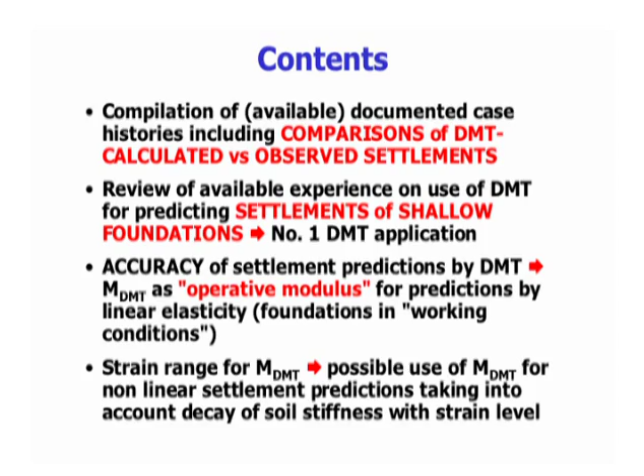Some of these aspects have been already illustrated so far, so I won't give many details. Just to recall that the constrained modulus MDMT is the basic deformation stiffness parameter obtained from DMT.

The important fact is that this modulus is obtained from DMT measurements by using a correction factor depending on KD, the horizontal stress index, that incorporates information on stress history and horizontal stresses. And the necessity of stress history for a realistic assessment of settlements has been emphasized by many researchers.

Many comparisons available, both in terms of comparisons of moduli from DMT and obtained by other methods, say high-quality oedometers, and also in terms of predictive and observed settlements, have shown that this modulus is reasonably accurate and dependable for everyday design practice.

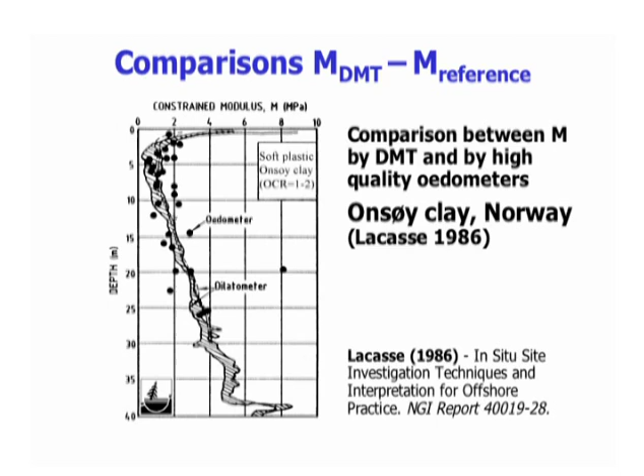These figures have already been shown. This is a comparison between moduli from DMT and from high-quality oedometers obtained by Lacasse at NGI in Onsoy Clay in Norway.

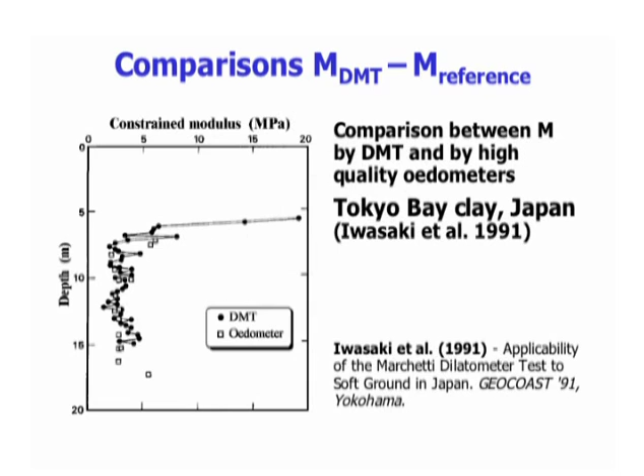So the method for settlement calculations that we prefer to use is the traditional one-dimensional method based on the linear elasticity approach. In this method, stress increments are calculated by use of the classic elasticity theory solutions by Boussinesq, and the constrained modulus is obtained from DMT.

As an alternative, if one wants to make 3D settlement calculations, it is possible to use Young's modulus obtained from the constrained modulus using the classic elasticity theory relation. And in general, the results obtained by the 1D and the 3D formulae are very similar.

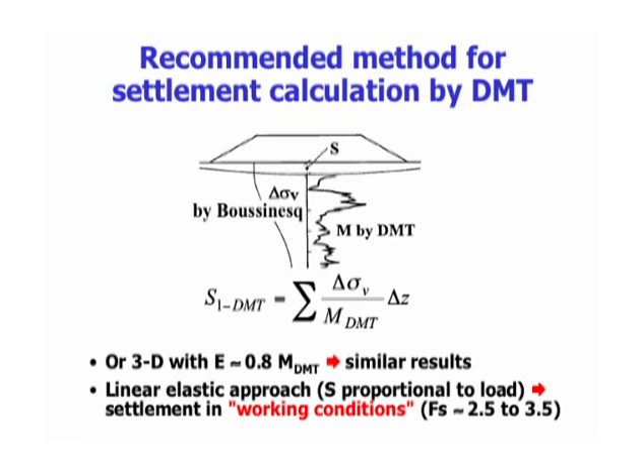It should be noted that this linear elasticity approach provides a settlement proportional to the load and is able to calculate settlement in working conditions, for foundations in working conditions, say for a safety factor typically 2.5 to 3.5.

Methods for calculating settlement by DMT were proposed initially by Schmertmann in '86, who proposed this ordinary method, which is substantially the one-dimensional method that we prefer to use. He also introduced a special method with the adjustment of modulus with varying effective stress during loading in the normally consolidated virgin compression and recompression range. But he also observed that the ordinary method is adequate in most cases.

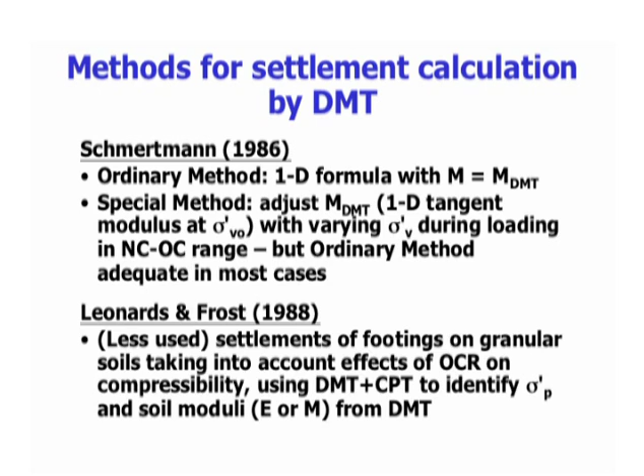Another procedure was proposed by Leonards and Frost in '88 for evaluating settlements of footings on granular soils, taking into account the effects of over-consolidation on compressibility, by using coupled DMT and CPT results to identify the pre-consolidation pressure and using soil moduli obtained from DMT. This second procedure, I think, is however less used than the one by Schmertmann.

So the database that we have collected to investigate comparisons of settlement calculated by DMT and measured includes both Class A and Class C predictions. The cases range from well-documented case histories, including details on soil properties, foundation characteristics, and measurements, to semi-qualitative assessments of DMT predictive and observed behavior without quantitative data, and also simple comparisons between moduli or settlements calculated by DMT and by other methods.

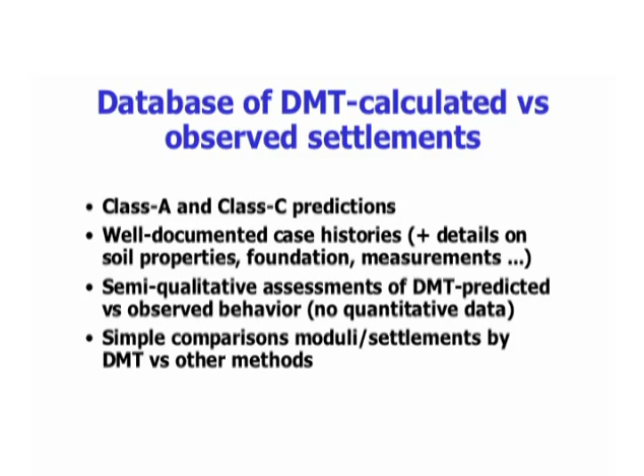So I will show some of the cases that are illustrated in the paper, not all the cases.

Of course, this is not a complete database. I think it would need to be updated from time to time, also including some contributions here at this conference.

This is a case presented by Schmertmann in '86, which is probably the most complete documented case, including 16 case histories concerning various soil types, ranging from peats and organic soils to clays, silts, and sands, and for different kinds of foundations.

In general, the ratio between the settlement calculated by DMT and measured was found mostly in the range 0.7 to 1.3, and on average equal to 1.18. That is a very good prediction.

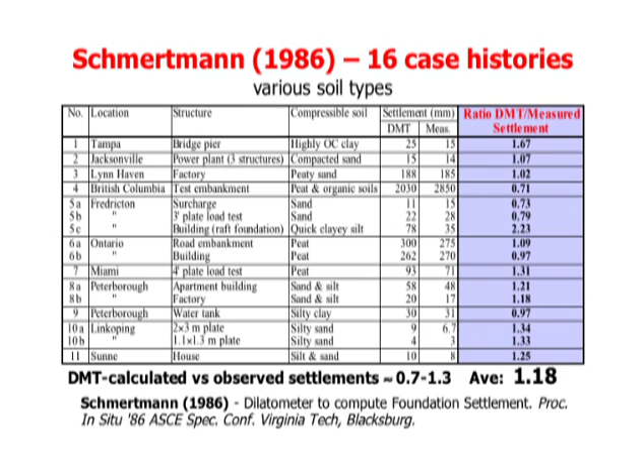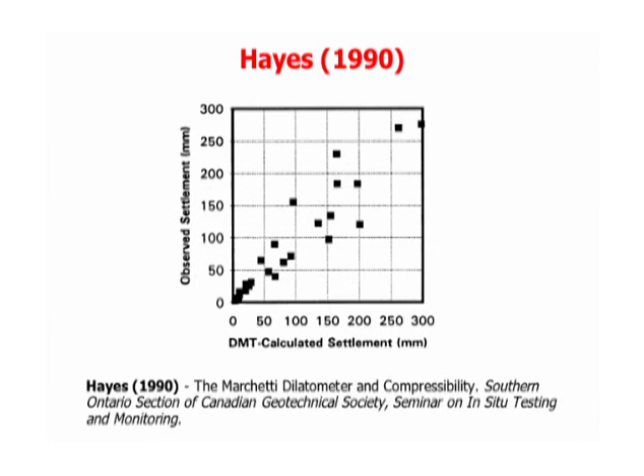This figure was also made by Hayes in '90 and includes some of the data shown by Schmertmann in the previous table plus additional data. It shows very good agreement between settlements calculated by DMT and measured, for a wide range of settlements.

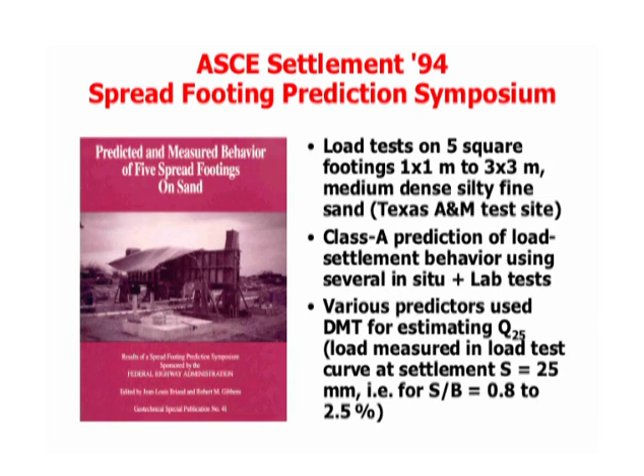The average ratio of DMT predicted to measured Q25 for all 5 footings was mostly in the range 0.7 to 1.2, say within 30% from the measured value.

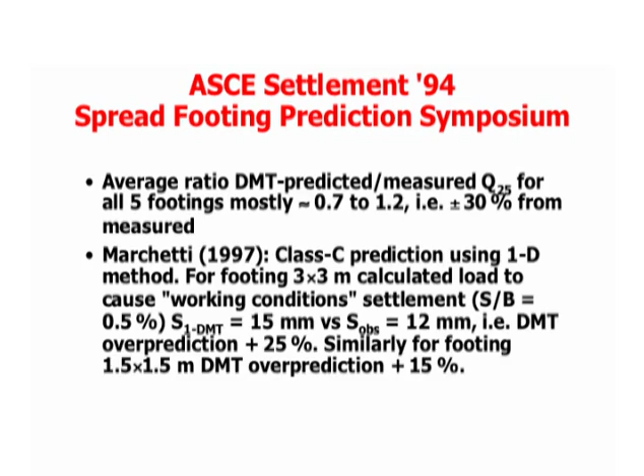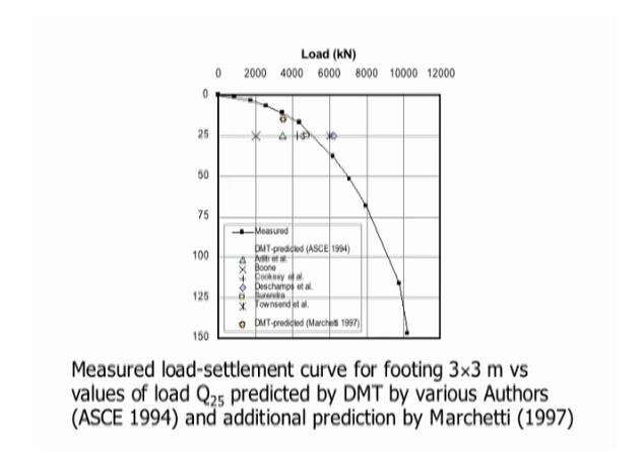An additional Class C prediction in this case was later made by Marchetti. For the 3 meter size footing, the over-prediction was 25%, and 15% for a smaller footing. The data are summarized in this figure, which shows the predictions by DMT as single points, and the curve is the measured load settlement curve for a footing of 3 meter size during the load test.

This is a case of a full-scale instrumented embankment constructed near Venice, a very important research project. I won't give much detail since I will present a paper on this subject tomorrow. In this case, the soils were highly stratified silts or silty clays and sands, typical of the Venice Lagoon. We were able to make a Class A settlement prediction before having the field measurements available.

It was found that the measured settlements also included a significant part of secondary settlement that developed during construction, occurring essentially in drained conditions as demonstrated by piezometer readings. So in this case, the DMT predicted settlement, net of secondary settlement (since DMT cannot predict secondary settlement), was 20% less than measured, which also included some secondary settlement during construction.

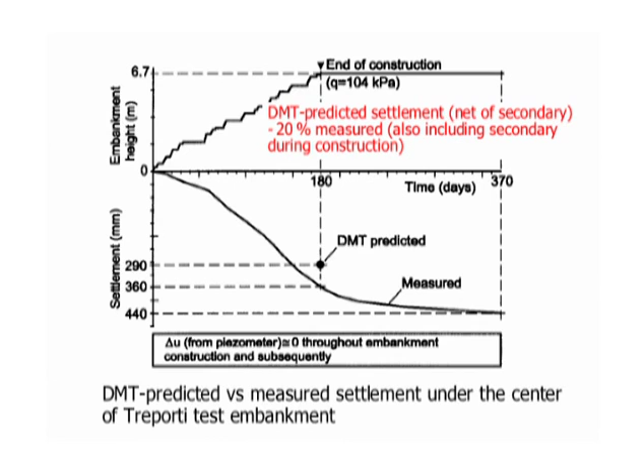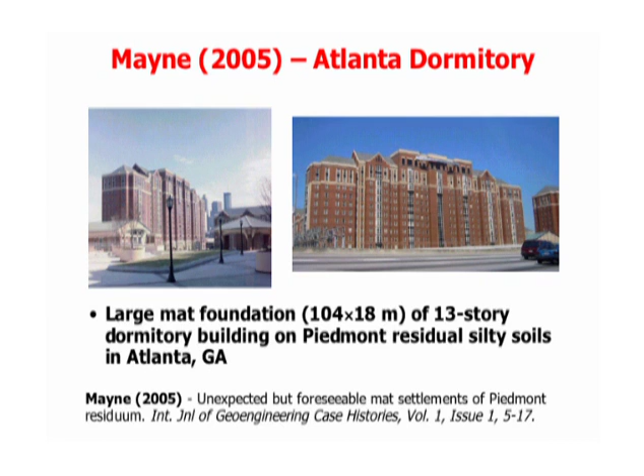This is a case studied by Paul Mayne, involving a large mat foundation of a 13-story dormitory building in Atlanta on Piedmont residual silty soils.

The settlement estimated by SPT was 46 millimeters, while the settlement measured at the end of construction was much higher, up to 250 millimeters at the center. Paul Mayne explained that such an incorrect prediction was due to over-reliance on SPT data, coupled with a poor choice of model used for analysis, and other bad judgments.

He also showed that settlement calculated by simple elastic solutions with input moduli from DMT and finite layer thicknesses are in excellent agreement with measured settlement profiles, and if carried out before would have warned the designers of these excessive displacements. This figure, taken from the paper by Mayne, shows a comparison of a settlement profile along a diagonal axis of the mat foundations, showing good agreement between predictions and measurements.

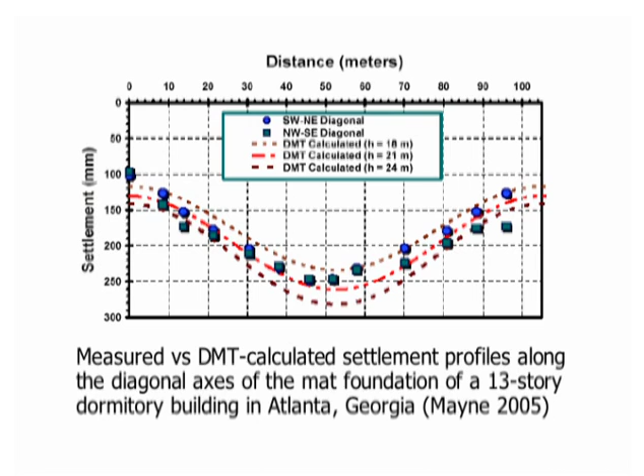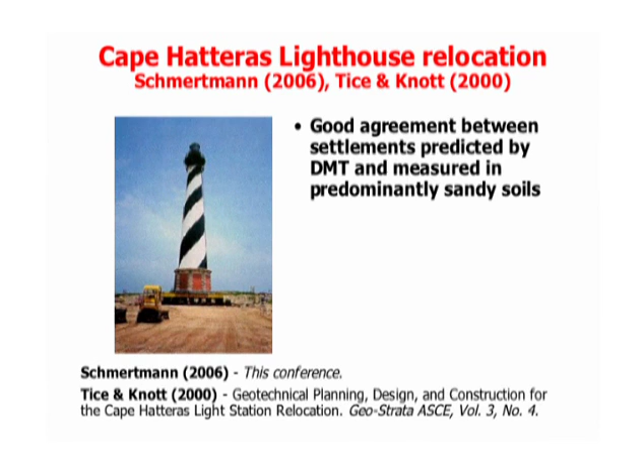This case has already been illustrated yesterday in his keynote lecture by Professor Schmertmann. The Cape Hatteras Lighthouse relocation has provided various comparisons of settlements predicted by DMT and measured, showing very good agreement, as we have seen yesterday.

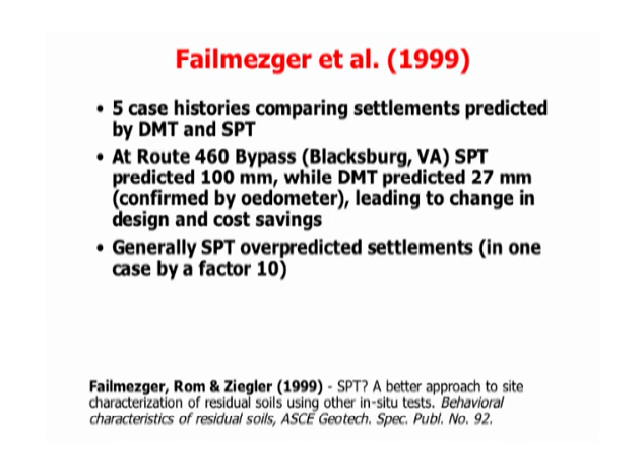Roger Failmezger, I think, has produced a lot of contributions on this subject, mostly concerning comparisons of settlements predicted by SPT and DMT, showing in general that SPT tends to over-predict settlements, and that the use of settlements predicted by DMT can in many cases lead to changes in design and cost savings, as shown also in this case this morning.

Roger Failmezger also analyzed in various papers the standard deviation of settlement predictions by SPT and DMT, and found standard deviations for SPT about three times the standard deviation for DMT.

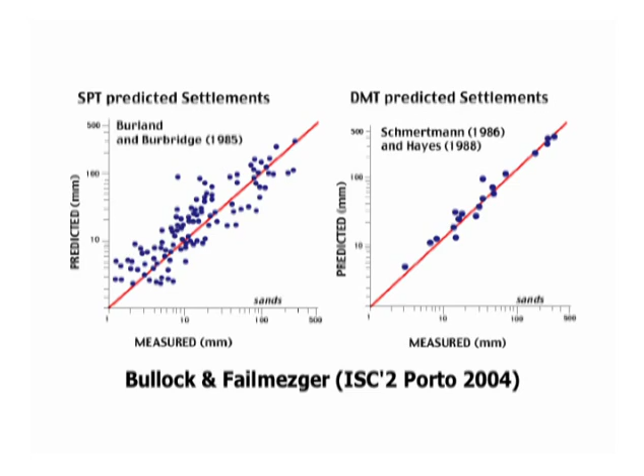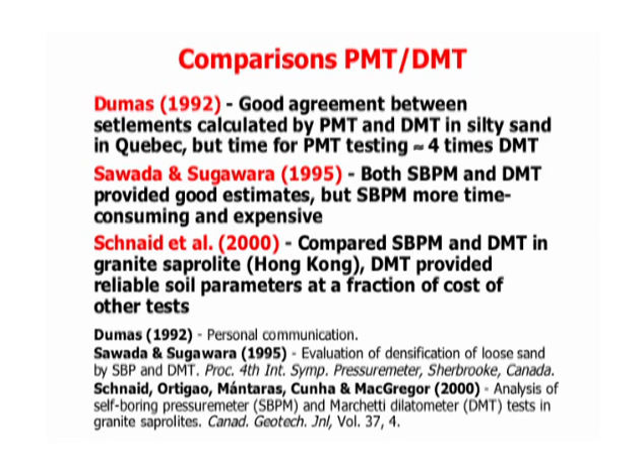There are various contributions comparing pressuremeter and dilatometer testing, and in general various studies have found good agreement between modulus settlement evaluated by the two tests. However, various authors have indicated that the time required for pressuremeter testing is about four times the time required by DMT, and also the costs are higher.

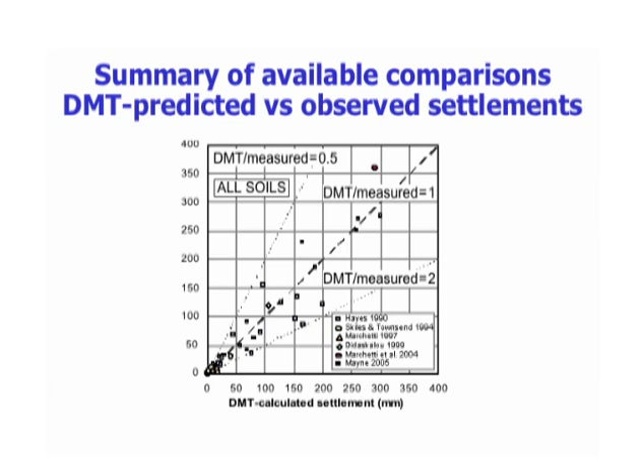There are many other contributions mentioned in the paper, and others that need to be added subsequently. This figure is a summary of available comparisons of settlements predicted by DMT and measured. It includes over 40 data points taken from the case histories I have mentioned, including numerical data, and it can be seen that in general we have good agreement between settlement predicted and measured.

This agreement applies to a very wide range of soil types, including organic soils, silts, and sands, and for a wide range of settlements ranging from a few millimeters up to over 300 millimeters, and also for different widths of foundations, including small footings as well as large rafts and embankments.

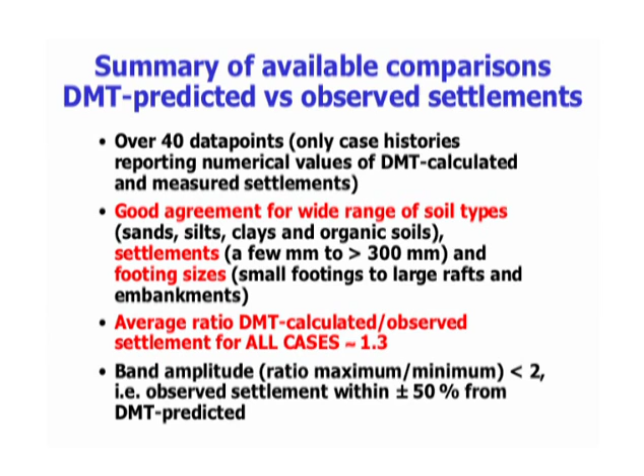The average ratio between calculated and observed settlements for all the cases was 1.3, which is a very good result. Also, the band amplitude, that is the ratio between the maximum and minimum, is less than 2, meaning the prediction is not more than 50% far from the real value.

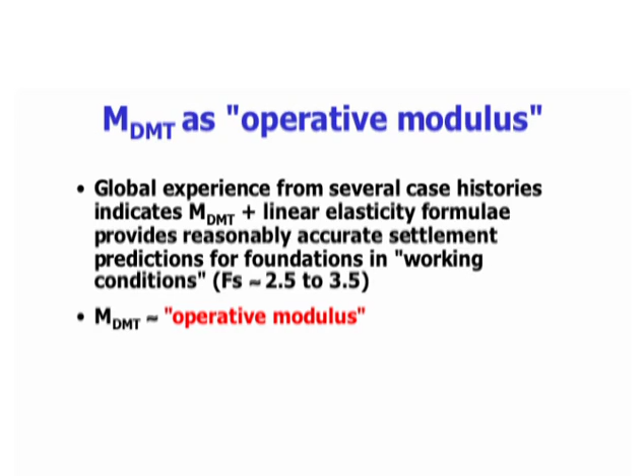So the global experience from several case histories has indicated that MDMT, coupled with linear elasticity, provides reasonably accurate settlement predictions for foundations in working conditions, say for safety factors of 2.5 to 3.5. So MDMT can be considered a reasonable operative modulus.

Current research investigates the possible use of MDMT for settlement predictions based on nonlinear methods, taking into account the decay of soil stiffness with strain level. The objective is to develop methods for evaluating in-situ decay curves of soil stiffness with strain level, like G-gamma or similar.

The aim is to derive tentative G-gamma curves using the seismic dilatometer, by fitting reference laboratory curves through two points. The first point is the initial modulus G0 from shear wave velocity measurements, and the second point is the modulus at operative strain corresponding to MDMT, provided the strain range appropriate to this modulus is defined at least approximately.

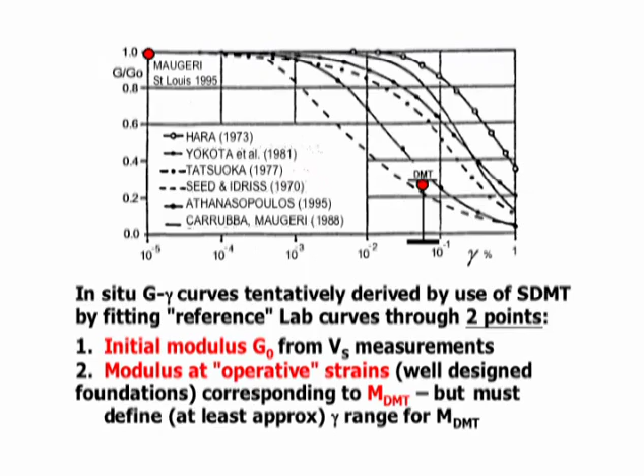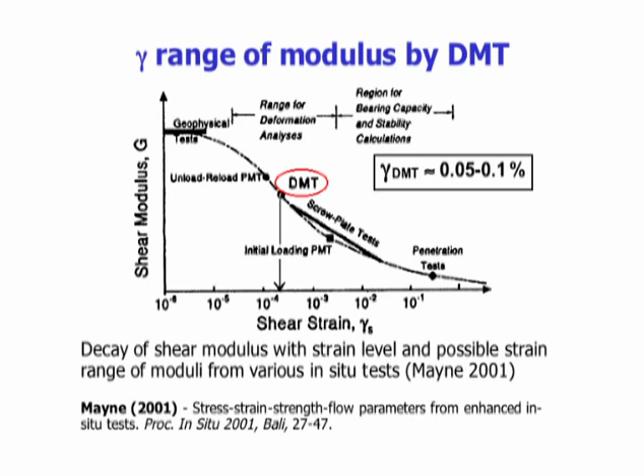Some preliminary indications about where this strain range could be located have been given by previous studies. This figure, by Mayne at the Bali conference, indicates a possible gamma strain range for the DMT modulus from 0.05 to 0.1%. A similar indication was given at the same conference by Ishihara, who located the DMT within the group of methods at an intermediate strain level.

In most of the cases we analyzed, the MDMT predicted settlements well for a ratio between settlement and width of foundation, S over B, mostly in the range of 0.5 to 1%.

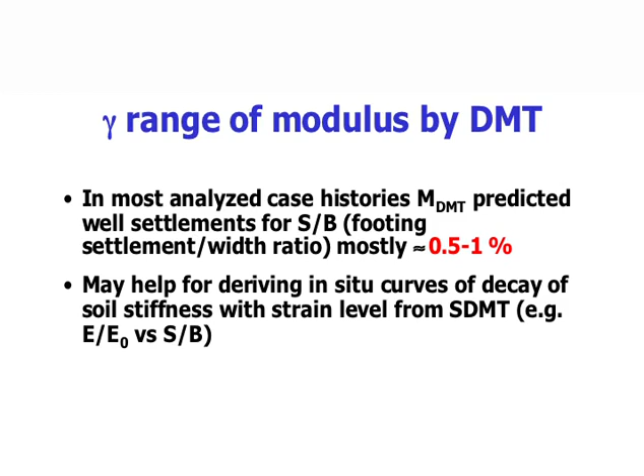And this information may help for deriving in-situ curves of decay of soil stiffness with strain level from the seismic dilatometer, that could be expressed in terms of decay of the Young's modulus over the ratio of relative settlement to width of the foundation.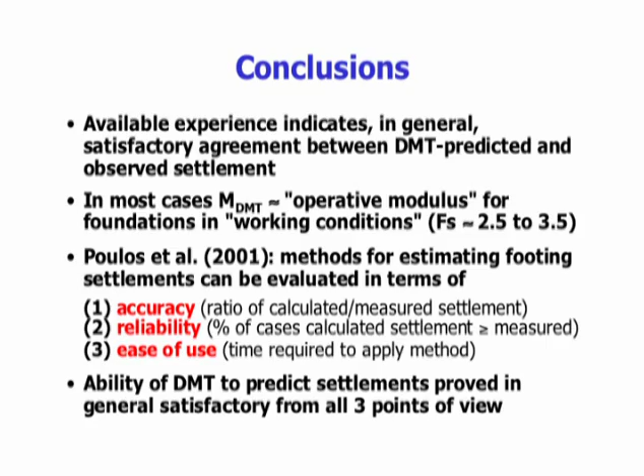So in conclusion, the available experience indicates in general satisfactory agreement between settlements predicted by DMT and measured settlements. And in most cases, the MDMT proved to be a reasonable operative modulus for foundations in working conditions. As stated by Poulos at the Istanbul conference, methods for estimating settlements of footings can be evaluated in terms of 3 parameters: accuracy, the ratio of calculated to measured settlement; reliability, the percentage of cases in which calculated settlements were greater or equal to measured settlements; and ease of use, the time required to apply the method. Based on the available data, the DMT proved able to predict settlements with general satisfactory agreement from all 3 points of view. Thank you.

This presentation in some respects could be called the effects of construction. But anyway, if you look at the dilatometer test, it provides a high quality mini load test at each test depth. Marchetti has talked about this. People want to argue about whether horizontal or vertical - in this case you're applying a load in the horizontal direction, same as lateral loads, so there's no dispute there. You have a nearly continuous profile of data, and the DMT provides all the data required for PY curves, so the DMT is ideal for lateral load analysis. It's certainly a good tool.

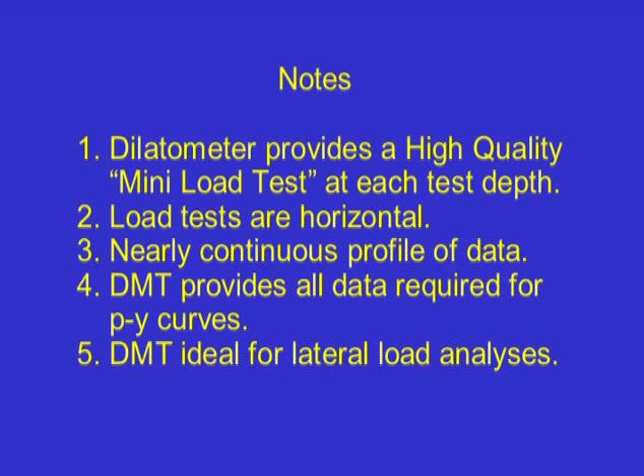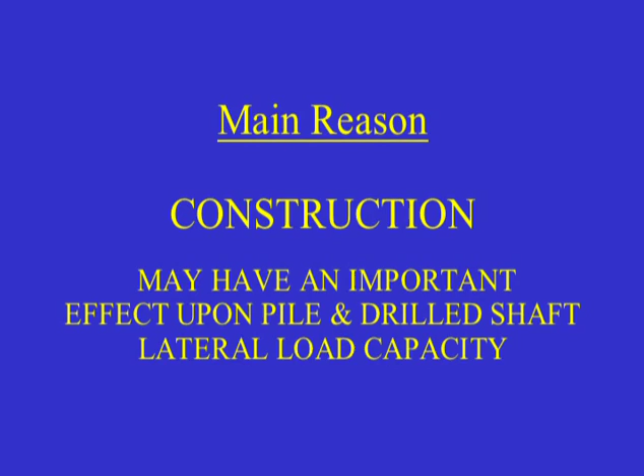So why are these modifiers necessary? The main reason is construction. We have very little information on the effects of construction on lateral loads. Some years back, we started realizing that construction had an important effect on vertical loads, for example for drill shafts especially. And we're beginning to get some information, indirectly and directly, on the effects of construction on lateral loads. So let's look at some drill shaft examples.

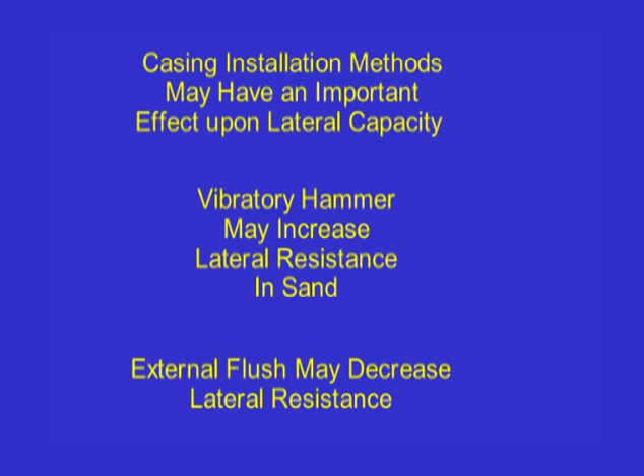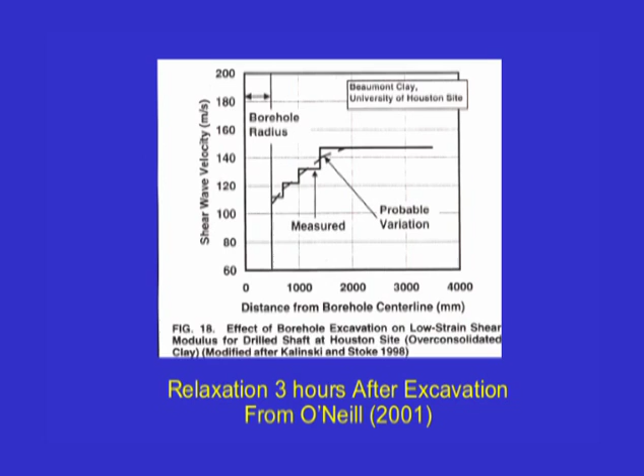Let's look a little bit about time effects on drill shaft sidewalls. When you open a borehole, you have soil relaxation, softening of sidewalls, and slurry buildup. This is from O'Neill's Terzaghi lecture in 2001 - he measured the shear wave velocity at different distances away from the edge of a borehole. So this is radius of borehole, and you can see it gradually increases and becomes constant out here, at about 2.5 radii. So if you take your dilatometer test, or whatever type of test, out here, you're certainly going to have a different strength than if it's close to the shaft. In fact, O'Neill estimated that the shear strength right by the sidewall of the shaft is about 50% of what it would be out here.

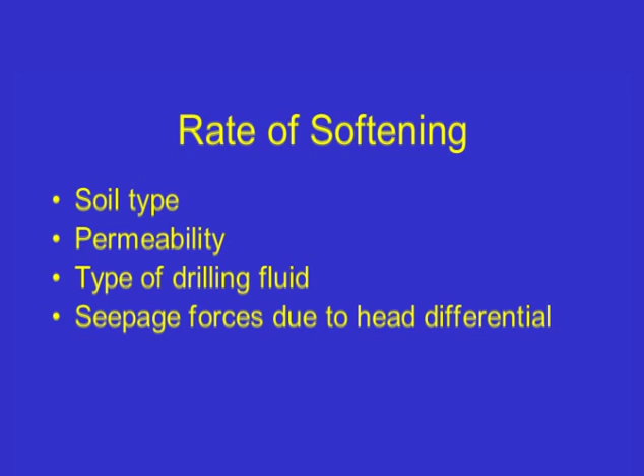Let's look at the rate of softening. It depends on soil type, permeability, type of drilling fluid, and seepage forces due to the head differential.

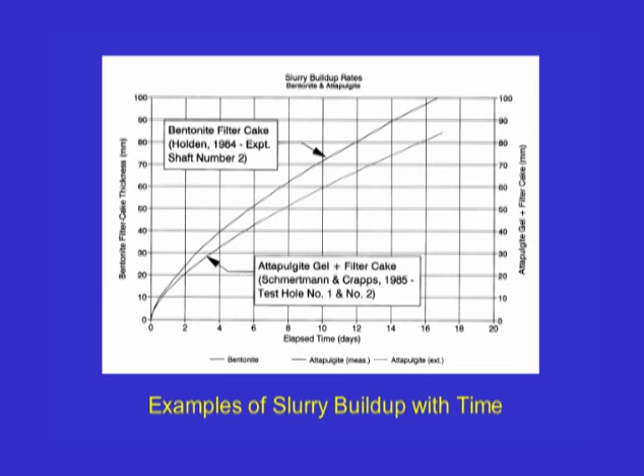These are data from two different sources. One is from bentonite research on a project in Australia that Jim Holden was involved in, where they had a shaft open for a long period and measured the buildup of bentonite over a little better than 16 days. The other is from a job in South Florida, with results presented in '85, where we measured the buildup of attapulgite on the sidewall of the shaft by taking sidewall samples at different times.

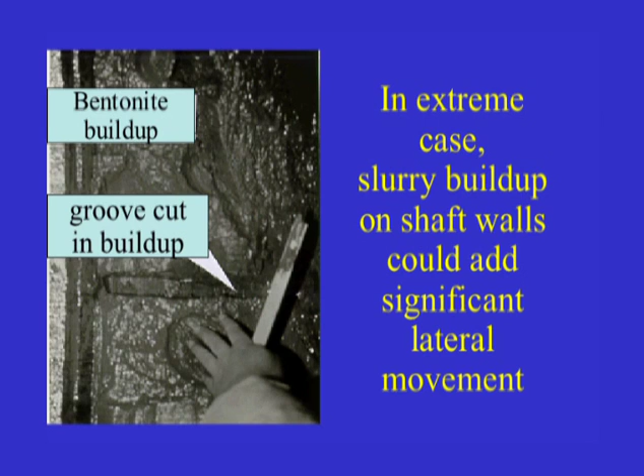Let's look at this picture. This was a shaft that was open for a long period of time, and they pumped it down, and this is how it looked. This is a groove cut into the bentonite buildup, and look how thick it is. You can imagine this would introduce a delta Y that you'd need to account for to have a good correlation with a lateral load test.

Let's look at time effects on lateral resistance of drilled shafts. Basically, this results in a decrease in lateral resistance and an increase in lateral movement.

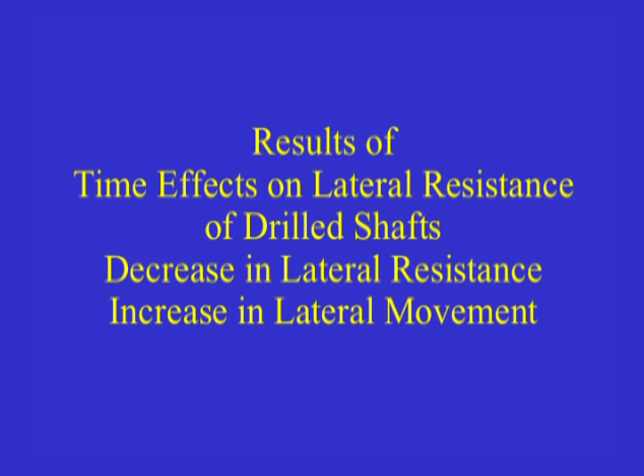Let's look at what happens at the bottom. You have all the same things at the bottom that you have on the sides, plus you have sedimentation of suspended materials.

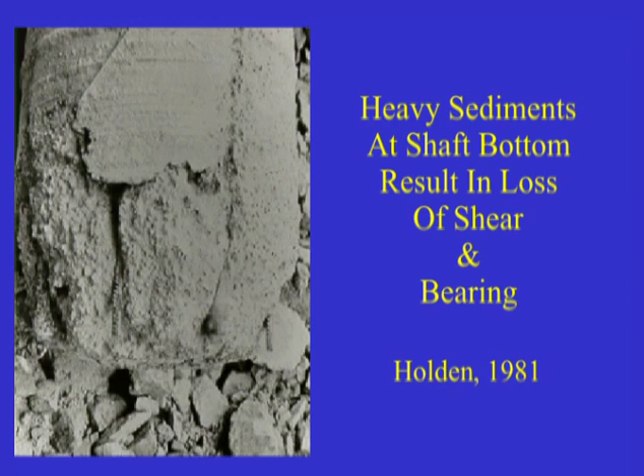Sedimentation can have an important effect on lateral resistance, especially for a short shaft. This is a case where you had a lot of suspended material at the bottom of the shaft, and you end up with a bullet-shaped nose, reduced end area. This part that's missing would have been mud. So if you had a short shaft socketed into rock a short distance, and you were counting on this to provide a toe, you'd have a certain amount of rotation before you'd really start building up resistance.

Let's look at possible results of time effects on lateral resistance, especially for short shafts: decreased lateral load and increased lateral movement.

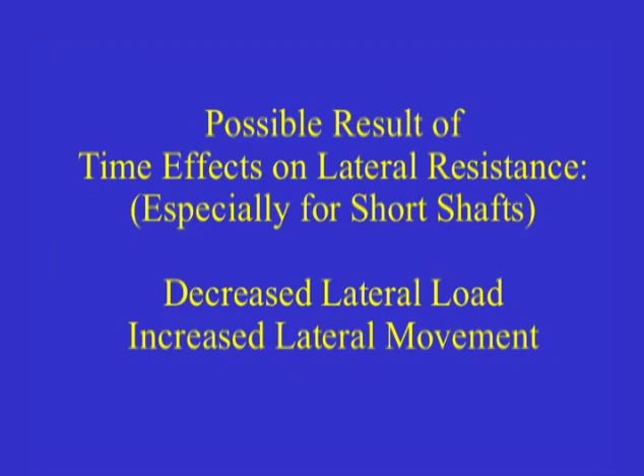So these are some results. This is S over D, the space between the jet and the pile, and this is the ratio of the after capacity divided by the before capacity, before jetting. You can see if you jet a pile, it basically penetrates under its own weight, so at this point you have no resistance.

When you get out here at 5 diameters, the ratio is about 6/10, and you have to get out to around 25 diameters before the effect becomes insignificant. So if you take your sounding here and jetted a pile in, you could certainly expect some decrease in strength and increase in lateral load or movement with an effect like this. Now, when you drive a pile, of course, you have some reconsolidation of the sand.

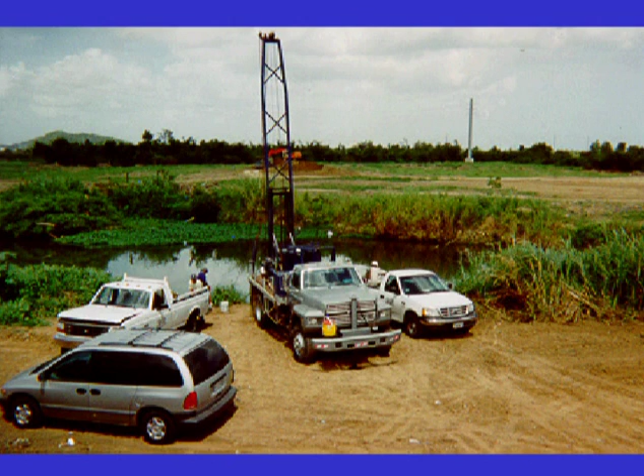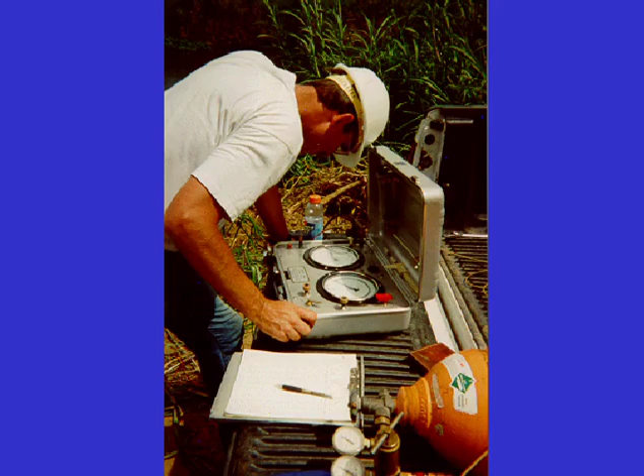So here the guys are doing the test. You saw this yesterday. This is the contractor coming to site. This is San Juan in the background, and right over here is a landfill that's about 150 feet high, say

30 or more meters high. The piles are instrumented. The contractor wanted to drive the piles initially, as far as he could, with a vibratory hammer. Now, if you were driving in sand, you could expect some change in your measured soil values before and after driving with the vibratory hammer. But the predominant soils at this site were clay, and anyway, he wasn't able to drive very far.

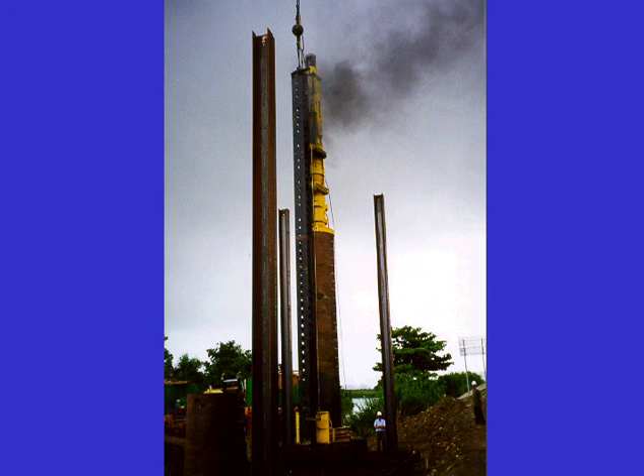Before he had to use a diesel hammer, he proposed using, and that's what he did, a diesel hammer to drive them the rest of the way.

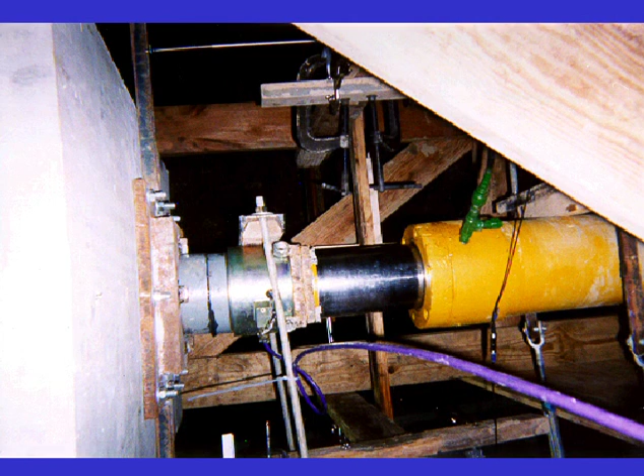We had a lateral load test, one. By the way, there was a little bit of excavation before the first test, and I'm going to call that the before-excavation test because that excavation was relatively minor. But this is a jack. We had hemispherical bearings, with a cap on each pile, and a strut between them. We had a jack with a long stroke, and a load cell that measured load accurately. So here was the other end of the strut on the other cap.

And these are results. We did a first static test at this level, and we did an unload and a reload. We had a short pile and a long pile, and the long pile was about 20 feet longer than the short pile. Now, I know of no reason that the short pile would have more resistance than the long pile, other than maybe just site variability. There's a little bit of difference.

Now, by taking into account the effects of excavation, we're able to get good agreement between predicted and measured values, basically by using a P multiplier of 1.1.

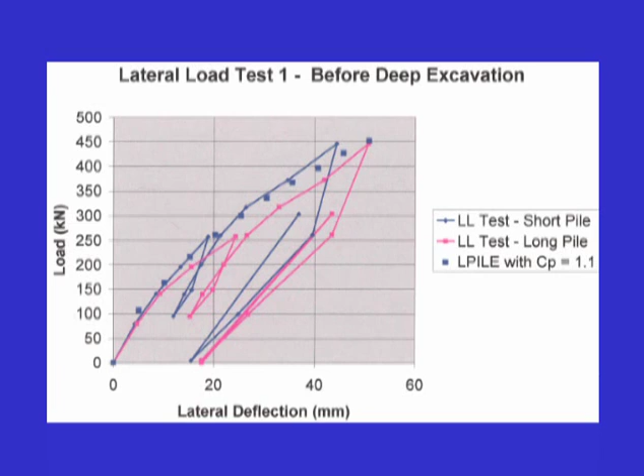After we completed that test, by the way, there were also some stat-dynamic tests, which I'm not going to go into. But after testing was complete at the first level, we built a cofferdam and excavated the cofferdam down about 6 meters.

This was a lateral load test after the deep excavation. One of the things I want to point out, by the way, is this platform built inside that's supported on the wales for the cofferdam. We had wooden reference beams, of course, for weather protection. The piles were instrumented. We had inclinometers that we could use to measure the deflection with depth in the piles, and it was a pretty closely controlled test.

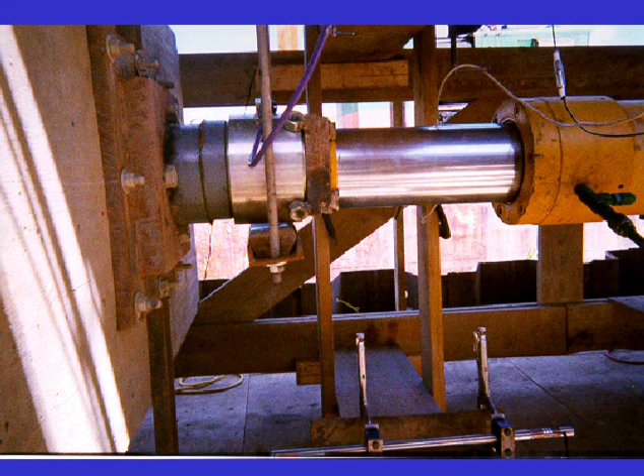But well, here's the jack. I mentioned we had plenty of movement. We had a jack that would move, actually about a 36-inch stroke, so we could move it out as far as we needed to or wanted to.

But what I was going to say about the excavation now, what do you do about the excavation? How do you take it into account? Now remember that we excavated 20 feet of material.

Well, there's some effect of the excavation on the parameters that you measured before excavation. So in this particular paper, in the appendices, I attempted to account for the effects of excavation on all the parameters that are used in deriving the values for the critical Y and the P ultimate.

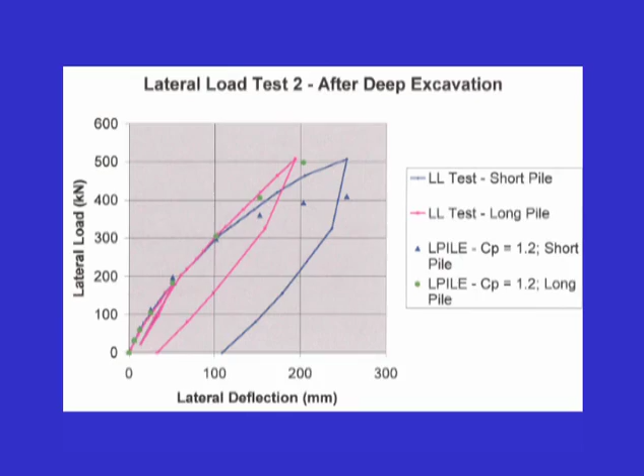Well, with a multiplier of 1.2 for P, we got pretty good agreement with the long pile. Now, for the short pile, we could have gotten better agreement if we had put a load at the bottom, maybe to simulate the shear on the bottom of the shaft or pile. But we were right at the verge of a rotational failure in this particular pile, and anyway, I thought it was important to do as little adjustment as possible, but to demonstrate the point.

So I think we have pretty good agreement, and our comparisons with slope inclinometer information down the pile also compared well, with these relatively minor adjustments, provided you take into account the effects of excavation.

I'd like to acknowledge the Army Corps of Engineers. It was their project, and of course GPE. And I'd like to answer any questions if I have time.

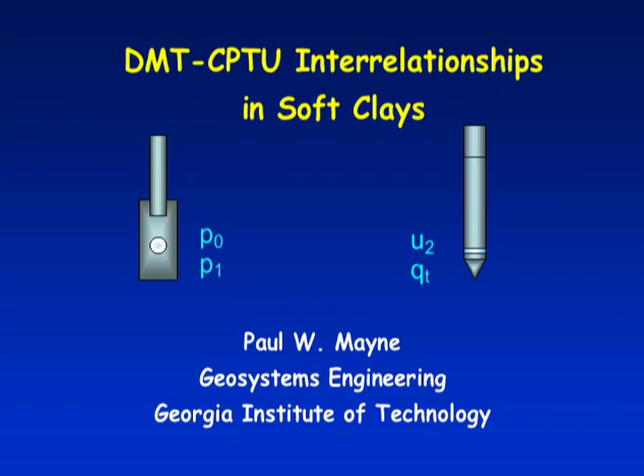Sometimes it's good to look at some interrelationships amongst some of the in-situ tests that we use for site characterization. So today I'm going to look at the flat dilatometer measurements P0 and P1 in comparison with its sister, the cone penetrometer, and the measurements U2 at the shoulder—the pore pressure—and the tip resistance QT.

And why would I do that? Well, way back we had some work with Dick Campanella, where they built a special research dilatometer. It was able to measure pore pressures right in the middle of the membrane during the insertion process and also during the inflation process.

We have this now on demonstration. We have a little display center for the flat dilatometer down at Georgia Tech, so that if I'm unable to take students outside, I always like to take them out on a nice rainy, cold day. And if that's not possible, we just stay inside and look at the equipment here.

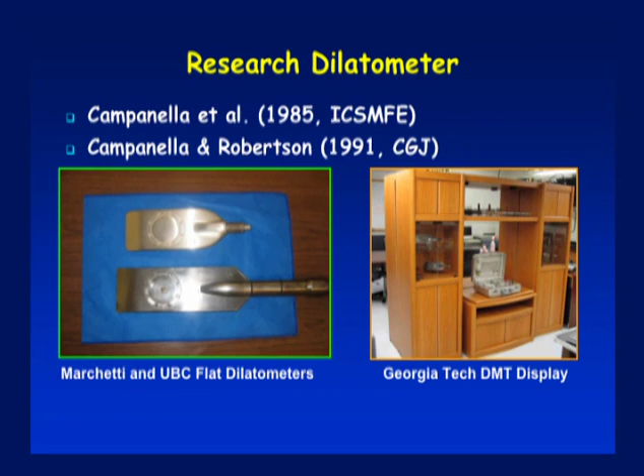The data that Dick Campanella showed at the international conference was a measure of the full pressure versus the deflection curve. We have a curve where the membrane's going up—we measure the pressures during inflation and then deflation. You also have that pore pressure sensor, shown as that dashed line. P0 is the beginning here, and P1 is the fully loaded point at 1 millimeter in this case.

And then the unload, which they call P2. They said, well, gee, P2 is pretty close to the insertion pore pressure, the UI. So let's say that P2 is a first order measurement of the initial penetration pore pressure. And then I sort of have geotechnical eyes.

I always have to explain this to my structural engineering students because they're into the perfection of things, to 3 and 4, 10 decimal places sometimes. I said, well, in a geotechnical person's eye, P0, P1, and P2 are essentially all the same reading, plus or minus a few percent error.

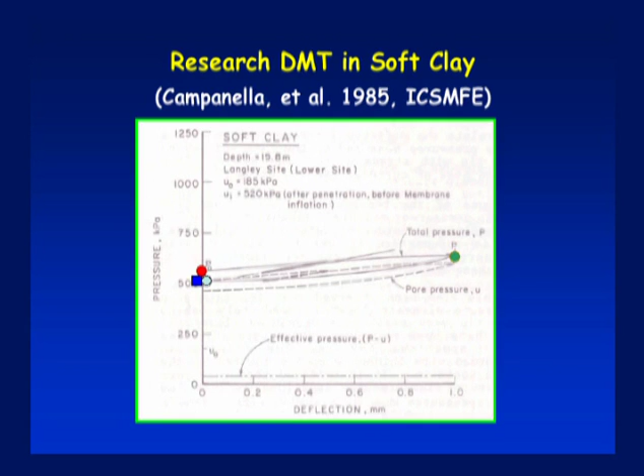So let me just say that P0, the red dot, is pretty close to the measurement of the blue dot. And so we went back and looked at that, and we compared data where we had penetration pore pressures from a piezo cone compared with the flat dilatometer liftoff pressure P0, and you can see there's sort of a relationship there that as the material goes from being very soft clay to firm clay to stiff clay to some of the harder clays, there's definitely an increase with those.

And why would that be? That would be because when you take any large body of clay, very old clays that are thousands of years old and they're sleeping, and then you wake them up by jamming some sort of a probe in them—that probe could be a pile foundation, it could be a cone penetrometer, a flat dilatometer—it has no idea what the shape is. It's just so surprised to be woken up after sleeping there for 10,000 years that you woke it up. It has no idea what the shape is at that instant of the penetration.

And you can see that in some interesting calibration chamber tests that An Bin Huang did up at Clarkson University. He had chambers of kaolinitic clay that he had pressurized, and he had the chamber instrumented already with these little finger needle pore pressure transducers, and he took a dilatometer shaped blade and jammed it right into the middle. Of course, he knew the exact axis and where that would end up within that deposit of clay because he'd set the stage, if you will. And so then he was able to measure the pore pressure isochrones.

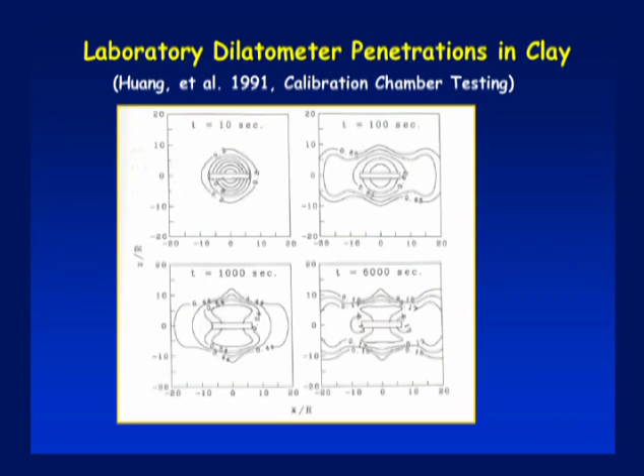You can see they're all very symmetric during T equals 10 seconds. The first 10 seconds is the initial penetration. Everything's isotropic. It doesn't have any idea what the shape of that device is. It's just so surprised to be shocked by a penetrating object. Now, obviously, given some time—100 seconds, 1,000, 6,000 seconds—it eventually figures out the shape. But during penetration, it doesn't know.

So one way to explain this is that cavity expansion is one possible way of approximating both the cone penetrometer and the flat dilatometer, and I sort of wish Alan Lutenegger was here because I see he has a paper where he's using cavity expansion theory to explain some of the readings that he's gotten in flat dilatometer.

So after we looked at this relationship in the 80s, I thought I'd go back and look at some new data that we'd collected, some new data from some of the national geotechnical sites. Just wanted to see was that trend still holding true? And what about the other reading of the flat dilatometer, the P1? Does that somehow relate to the QT reading on the cone? So I have these 3 national sites.

And then just before the conference, I dug up some old data that I had collected up in a chamber test up at Cornell University. So we have the Amherst National Geotechnical Site—that's a varved clay. Bothkennar's a famous site; the entire June issue of Geotechnique is devoted to 15 papers about the site characterization of this national test site in Scotland. And then there's the NGES that is right off of Lake Michigan there, Northwestern University, but in fact this site's just a little further away, right on the campus, and so let's look at some of that.

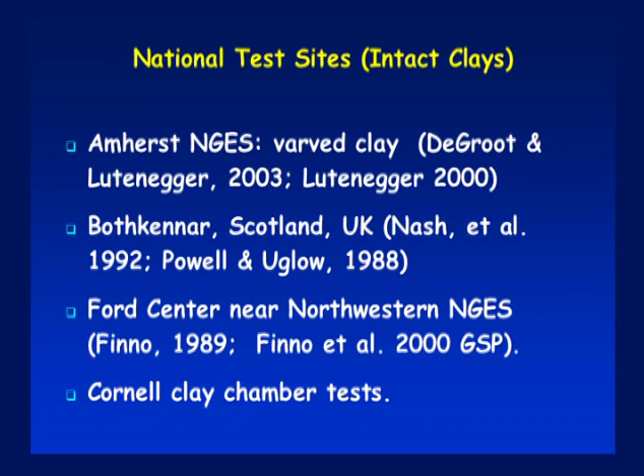Here's the Amherst site. The campus sort of sits up on the hill, and at the bottom of the hill we have some fairly thick deposits, maybe up to 30 meters of the famous Connecticut Valley varved clays from Lake Hitchcock.

Here's a little rig that Lutenegger uses there. He let us use it. It was rubber tired wheels at the time, and he's done a lot of foundation load tests. And I wanted Alan to be here because I think his test site's starting to look a bit like a cemetery, and I was wondering if maybe he'd kind of reserve a little monument there for me when I die.

So we went up there several years ago and did maybe 15 seismic cones, and you can see there's some variability. There's a little bit of fill and some crust, and then here's the very soft varved clay that I want to concentrate on, along with sleeve friction, pore pressure, and shear wave velocity.

We also did seismic dilatometers back then, and here's P0s, P1s, and arrival times of shear wave velocity, so we have some repeatability there.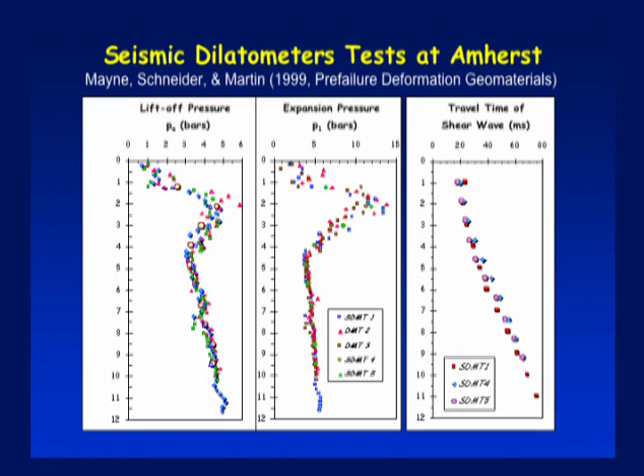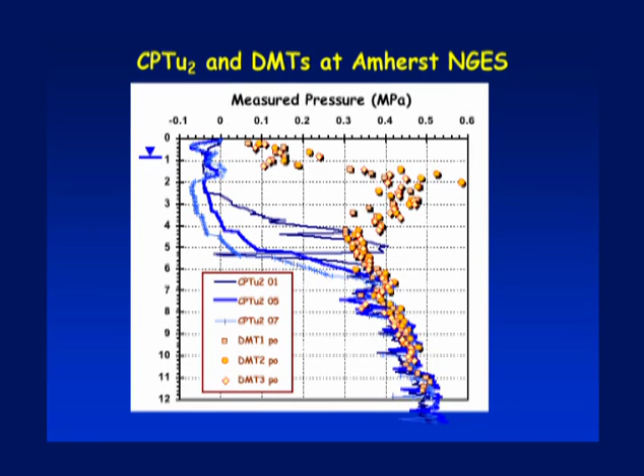These other ones seem to be slow in capturing as they go through this unsaturated zone. Good news is with the flat dilatometer, we're picking up the crust, of course, but we don't have a problem with desaturation. That was something missing in our early study - apparently people are still having pore pressure problems today when they saturate their filter elements and keep them saturated.

With the flat dilatometer, you can see there's a really nice match between P0 and U2 - extremely good match. But I have a problem with the piezo cone up here because it either got desaturated or my two graduate students who were up there were not doing their job properly.

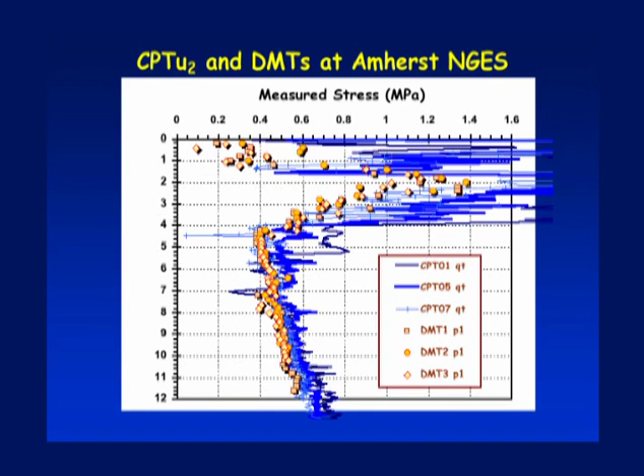While we're there, let's look at the QT, the blue squiggly lines - that's the cone resistance. They're just barely above the P1 reading, the expansion pressures from the dilatometer. So that's kind of interesting.

There's actually some other reasons why I picked these three sites. I wanted to represent a wide range in the effective stress frictional envelope of these materials.

Now let's move to Northwestern University. We went up there a couple of years ago. We got a little bit of money out of the National Science Foundation - that's all they have these days, just a little bit of money. It's kind of sad, present administration. In fact, right after this conference, I'm going down to 1600 Pennsylvania Avenue to talk to that guy, tell him to free up some more research money for geotech.

So we went up there. This is the little truck we use - just a Ford 350 flatbed, but it has the full 20-ton capability in the back end. It has two twin anchors that allow us to tie into the ground about 1 or 2 meters deep, and because of that we go down about 30 to 40 meters. Because it's a very small truck, I don't need any special permit. Anybody in this room with a regular car license can drive that truck. I don't have to stop at weigh stations, don't need to pay special taxes or insurance. So I can turn this loose for the students, and there we go.

Here's a bunch of soundings we did up there. This is the Ford Design Center, about 100 meters west of the NGES, which is not really in service anymore, but we did sneak a few soundings down there.

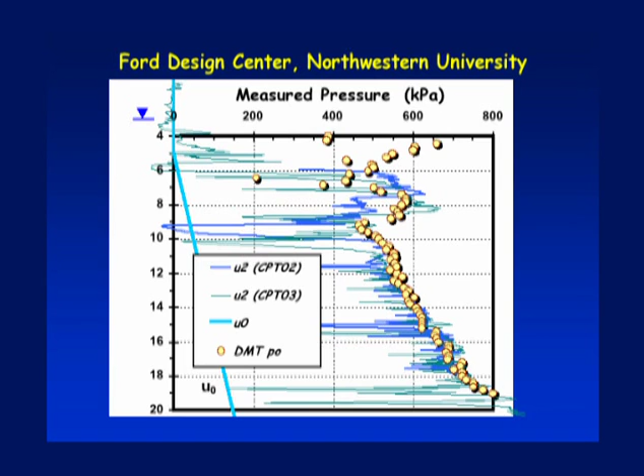Again, some little problems here, probably desaturation or not fully saturated elements, or perhaps sandy layers, but not shown in the P-naught. So perhaps we could use a comparison like that to detect zones that are maybe even fissured.

Maybe it's the degree of fissuring, because the work that John Powell's done at the Building Research Establishment has shown that in fissured materials, like some of the Brent Cross sites, the London clay and the Gault clay that are fissured, you start getting negative pore pressures. Frankly, I think that's a flaw in the pore pressure measurements of the piezocone.

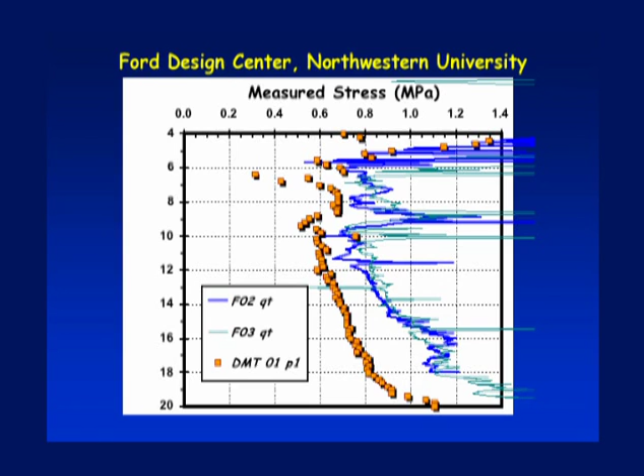So the dilatometer doesn't have that problem. Now let's compare the cone tip resistance, here's two soundings, some squiggly lines, versus the P1, which is the expansion pressure off of the flat dilatometer. You can see we're in the soft clay down here, and it's quite a bit larger now than when we looked at Amherst. At Amherst, cone tip resistance was barely above the value of P1, but in this case it's a good 50% greater.

And then I took this out of Nash et al, because the Bothkennar clay site is a fairly famous one. They have so many other tests, and so now we can see here's cone tip resistance is in fact a bit bigger than P1. And again, the pore pressure measurement, U2, is very, very similar to P0. So there's some very strong similarity between those two readings. There's something different about those two. Can we use that to our advantage somehow in site characterization?

Well, first thing I did was I did some statistics just looking at the P1 versus P0, and of course they're somewhat close together here, the factors, and you could represent that by I sub D, and that's what Silvano did 20 some years ago now. So that would explain that.

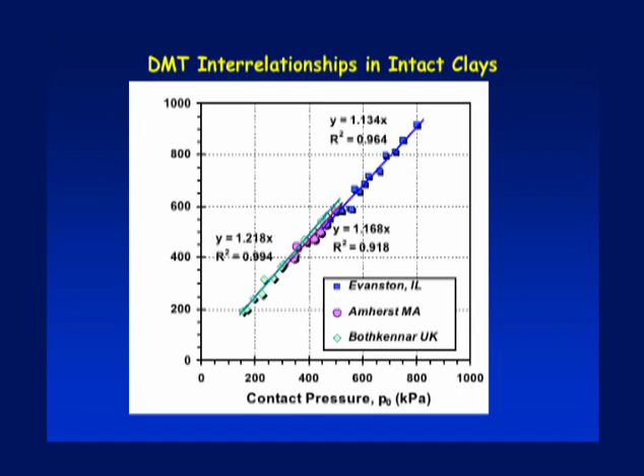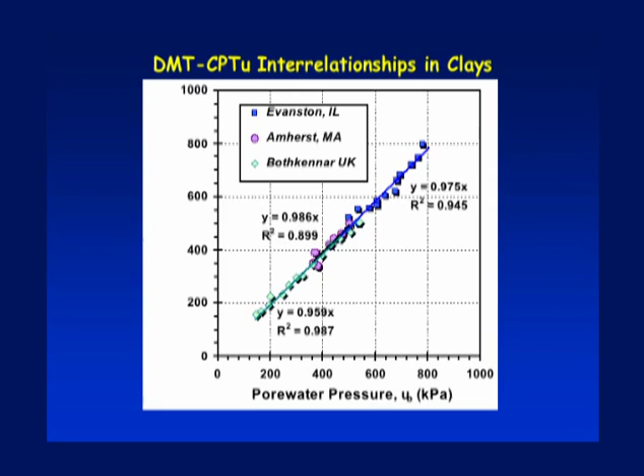Here's the P0 comparison with UB at the shoulder, and you can see here in each case these are very, very close to 1. It's a near 1-to-1 relationship, P0 to the shoulder pore pressure measurements during penetration. And then now we start seeing the difference here.

So I put the table together. I think what the difference really is is the frictional differences. One of the reasons I picked these 3 sites was because I know Amherst has a very, very low effective stress friction angle. Don de Groot has published recently in the Singapore conferences a nice overview paper with Alan Lutenegger. It's about 20 to 22 degree friction angle. You can convert that to the critical state parameter capital M, which is 0.85. It's the same information as 22 degrees.

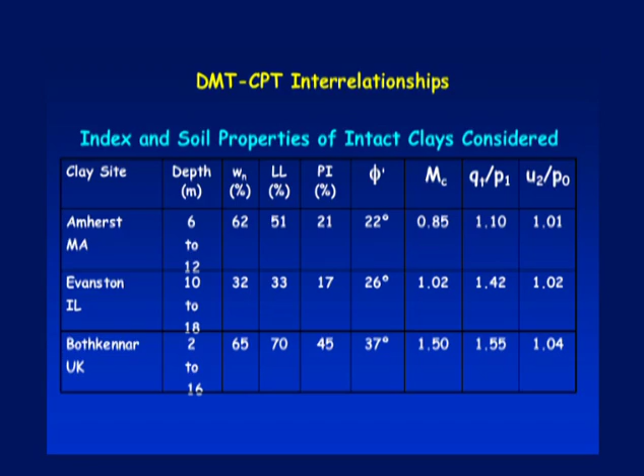Evanston's sort of an intermediate one. We had a big Geo Congress meeting there, prediction symposium in '89. It's about 26, maybe, I talked to Finno the other day, maybe 28 degrees he says, his latest set of tests. But Bothkennar's got a fairly high frictional response.

We're talking about the effective stress friction angle of the Bothkennar clay. It may actually even be higher than 37 degrees, but what I wanted to do was span it up, not just cluster a whole bunch of dots right around 30 degrees that probably a lot of you might assume is the friction angle of clay, 30 degrees, but in fact it could be 20, 30, or 40 degrees depending on what clay you're in. So I said, well, maybe that's the trend then. So I take the ratio of QT to P1, and that's increasing as the friction angle is increasing.

So perhaps there is a way of using some of the cavity expansion theories that Hai-Sui Yu has come up with, Alan Lutenegger's done that. I know we played with that. A way of interrelating that, but showing the difference in those readings because of the friction, the effective stress friction of the material, is actually different. And then just to see if there was some truth to that.

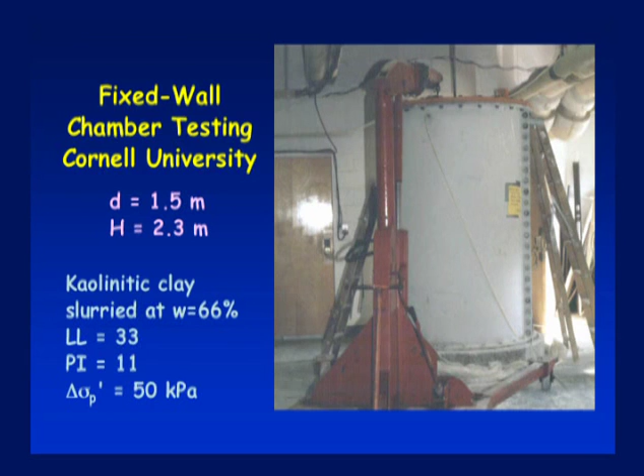When I was up at Cornell doing my own PhD, I built this large chamber. This is the kind of stuff Fred Kulhawy will make you go through when you want to do a PhD with him. Large chamber, 1.5 meters in diameter, 2.3 meters high. It took 6 months to fill that with clay slurry and then pre-consolidate it to 50 kPa. Then we unloaded it and did some testing. And the first set of tests, I'm going to show you the miniature piezo probes.

These are actually separate soundings: a miniature cone that Wayne Clough built with Brian Sweeney back at Stanford, and then 2 piezo probes that I built at Cornell. Here's a U1 element and here's a U2.

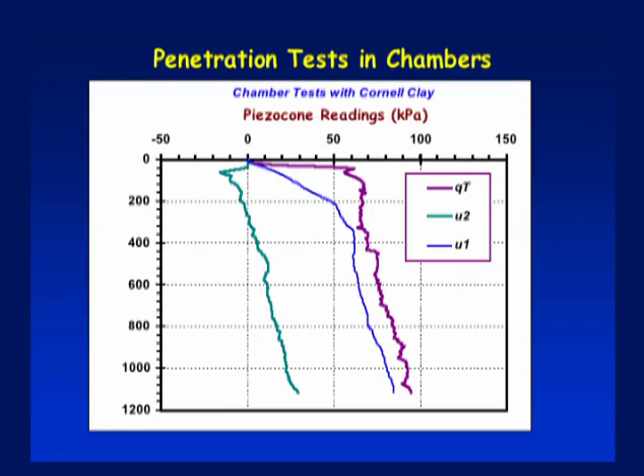I put that in my PhD dissertation, but it turns out on all the deposits we did something like 26 deposits of clay up at the Cornell lab, and we actually ran dilatometer tests. John was kind enough to sell me a used blade for $600, and then for another $200 I built my own little readout. So for $800 back at Cornell, I was in the dilatometer testing business—the cheap graduate student version of the dilatometer. Don't tell Silvano, he'll be upset he's not making enough money on that.

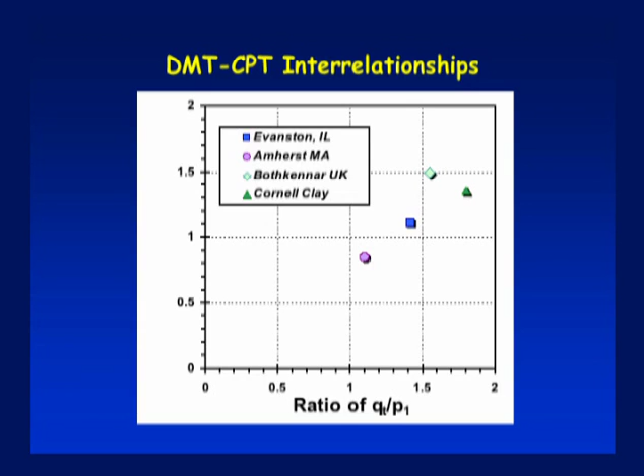So now I have a set of data on synthetic clays, and I could put that as a fourth point on this diagram. Maybe this is structured materials, and maybe this could be considered artificial or remolded materials, but it's still in that trend. I don't know that that's the highest quality data because it was from a few years back.

So what can we say about this? Perhaps there's some similarity between the P0 reading and the pore pressures measured on a standard piezo cone. The piezo cone pore pressures are affected by saturation problems—if you haven't done a good job saturating the element with the right material, maybe glycerin's the best. I know Vertek uses silicone oil, but we may have desaturation problems due to natural fissuring and crust. The good news is P0 isn't really affected by that.

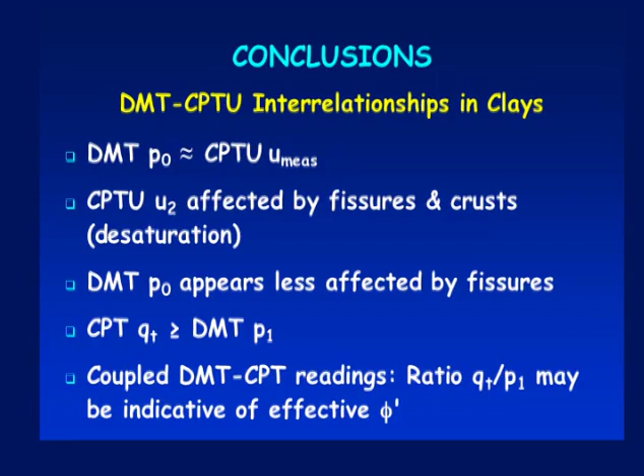So we generally see that cone tip resistance is a reading that's greater than or equal to the P1 reading, and it seems like that could be, with more investigation, affected by the effective stress friction angle of the material. I'm thinking maybe by using coupled CPT-DMT soundings—several authors have mentioned this—putting the two sets of data together may help us solve a very complex problem: the site characterization of very, very old materials that defy characterization. I'm hopeful this ratio will help us hone in on phi prime, which I think is a very fundamental property of the material.